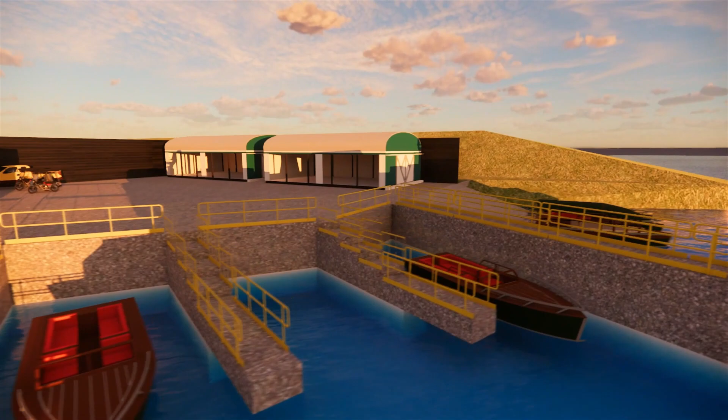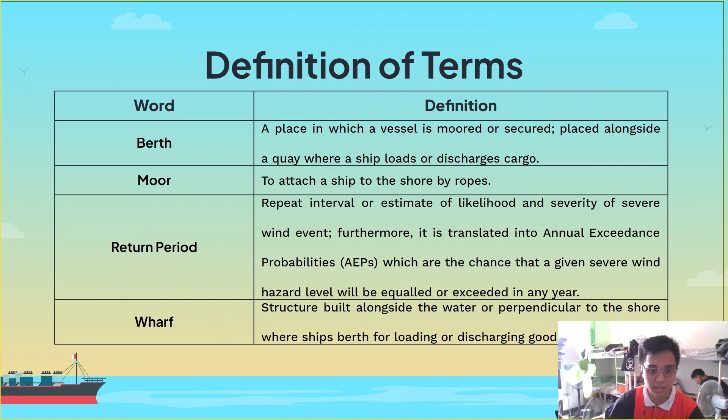For today's presentation, we will be presenting the Orion's Belt Port, our proposed port design of an artificial commercial and fishing harbor. Now for the first one, about the Orion Port, it includes the location, area, projected capacity, and the target beneficiaries. For the location, we intended to consider the area adjacent to our mission church and nearby the Orion Memorial Park. The access road for the facility will be shared with the Memorial Park

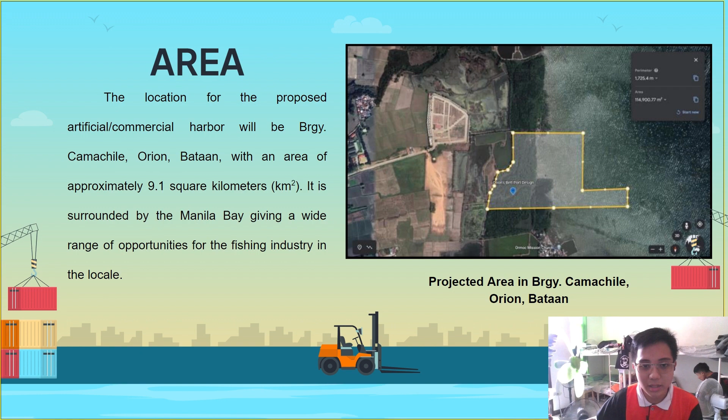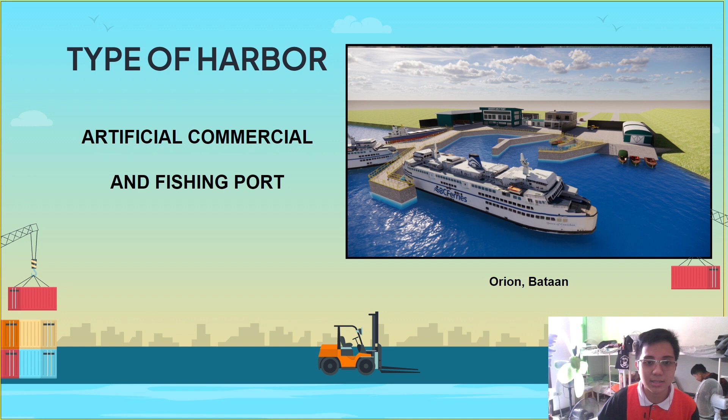approximately 767 meters apart from the Philippine National Road. And now for the area, the location for the proposed artificial and commercial harbor will be at Barangay Camachile, Orion, Bataan, with an area of approximately 9.1 square kilometers. And it is surrounded by the Manila Bay, giving a wide range of opportunities for local fishing industries. For the type of harbor, it is considered, as stated earlier, as an artificial commercial and fishing port.

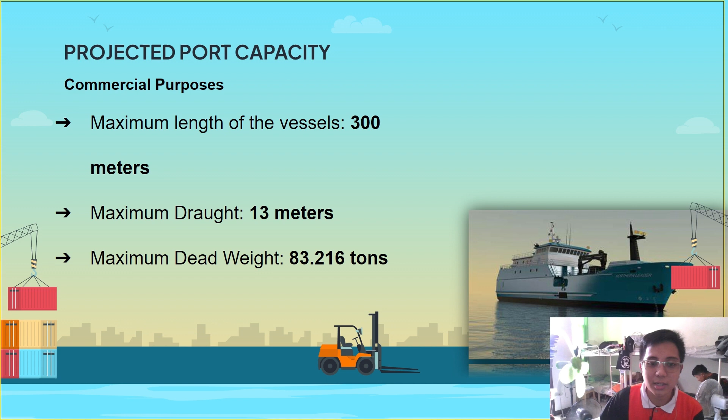For the projected capacity, first for commercial purposes, it has a maximum length of 300 meters, maximum draught of 13 meters, and maximum dead weight of 83.216 tons. For the fishing vessels, in accordance to Fisheries Administrative Order number 198-1 series of 2018, small-scale commercial fishing vessels have a range of 3.1 gross tons to 20 gross tons, medium scale 20.1 gross tons to 150 gross tons, and large-scale commercial fishing vessels greater than 150 gross tons.

Now, for the intended beneficiaries, first of all, the residents of the municipality of Bataan. Second, the people from Pampanga and Tarlac in the northern part of Luzon. Third, the passengers leaving the Manila port. And lastly, and most importantly, the local fishing sector industries nearby. The layout of the Orion port. The areas and facilities included in the design are further explained in Part 5.

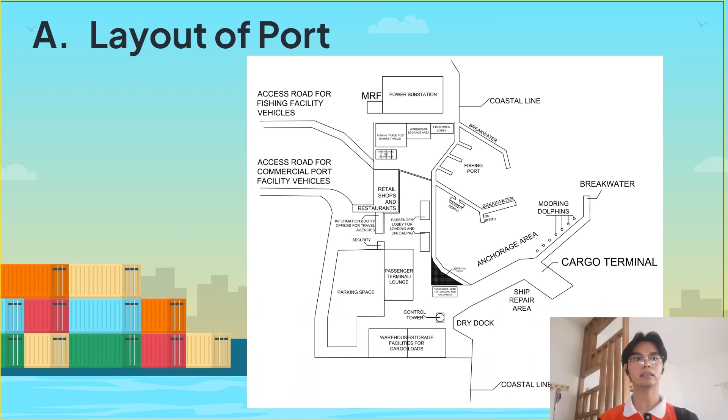The main layout is projected from the inspiration of the constellation Orion, which is partly considered in the position of the anchorage areas and etc. Moreover, the design considerations for the proposed project include the hazard report of the location, the accessibility and serviceability of the port, and lastly, the flow of the future users of the facility. For the road network of the port, the figure illustrates the flow of transportation and pedestrian traffic inside and outside the proposed project.

There are two designated access roads or entrances and exits for the site to be developed, one for the fishing area, and one for the commercial passenger or port area. The access roads are designed as two-way roads that connect to the road towards the national road. Furthermore, as the vehicle enters the commercial port, two options are given to the vehicle owner, whether to enter the premises for pick-up or drop-off, or to park on the parking spaces provided with its own entrance and exit.

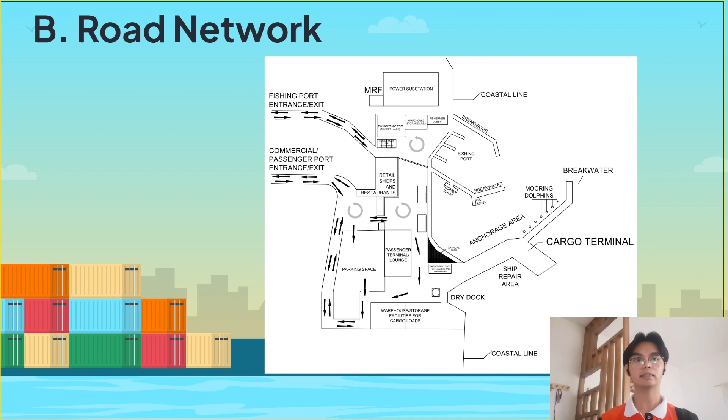Deliverables, cargo, loads, and freight are picked up on the road appointed around the parking areas to lessen the probability of traffic congestion occurring with the trucks and other vehicles sharing the access road. And lastly, the interior areas of the facilities are supposed pedestrian zones, with no vehicles allowed inside, and should be free for people flow circulation within the port facility system.

The hazard report that the proponents considered in the design of the port is the data from PAGASA for the chosen location. The wind hazard report indicated that severe winds may occur in the area. Meanwhile, for the seismic hazard, there are hazards from ground rupture, yet the fault line is assured far from the location, thus making it safe for the said hazard. The location is prone to ground shaking and is generally susceptible to liquefaction. Lastly, since the proposed project is on the coastal area, it is prone to tsunamis.

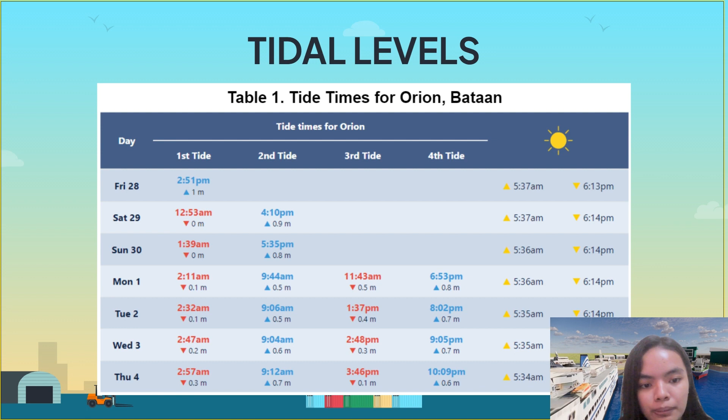The tidal levels for Orion, Bataan show that the highest tide that may occur is 1 meter above initial sea level. This data is from the tidal times chart from April 28 to May 2023. For the assessment of these hazards, there are countermeasures generated providing solutions to the safety of the proposed port. Countermeasures for the wind hazards are not included as no specific countermeasures are required, because the velocity of the wind reported, although severe, is considered normal in the station.

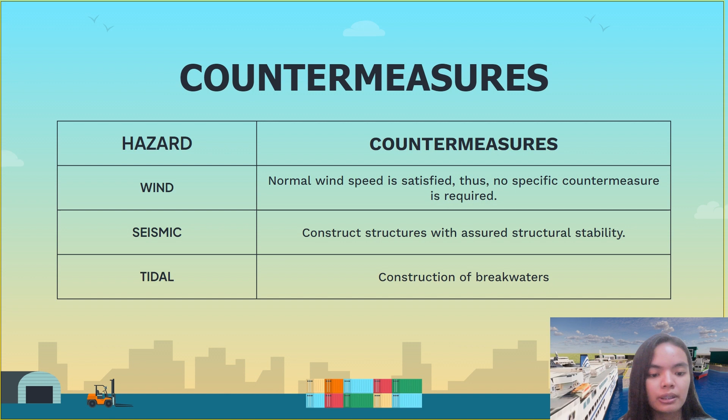For the seismic hazards, the plan is to construct structures with assured structural stability. And lastly, in response to the tidal hazard, there shall be construction of breakwaters to reduce the large currents, waves, and tides. So we have the facilities included in the Orion port. First we have the breakwater. It is a permanent structure constructed on a coastal area. It has a depth ranging from 30 to 70 meters and an area ranging from 70 to 160 square meters.

Next, we have the mooring dolphins. The mooring dolphins are smaller structures that are included in the design to assist the vessels in the anchorage areas. The mooring dolphins are situated on the major breakwater to be constructed beside the cargo terminal. Next, we have the cargo terminal facility, located next to the major breakwater and beside the ship repair area, and it has an area of 260 square meters.

Next, we have the ship repair area, often called shipyard, dockyard, or boatyard. The probable lot area for the maintenance is approximately 300 square meters. Next, we have the dry dock. It is an area from which the water can be removed for ships to be built or repaired. The projected area of the design is 15.35 square kilometers.

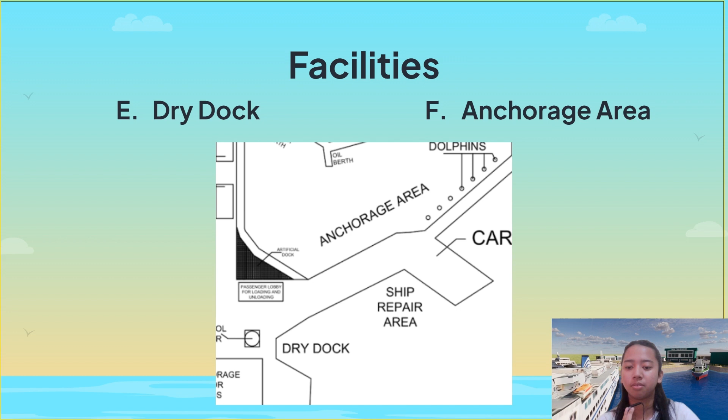Next, we have the anchorage area. It serves as the temporary parking of ships or vessels for the loading and unloading of passengers and/or cargoes. This has a proposed area of 11.63 square kilometers. Next, we have the berth. Berths are areas designated for the mooring of vessels. In the proposed design, there are two types of berths, namely tugboat and oil berths. The projected area for the tugboat berth is 6.76 square kilometers, and for the oil berth is 2.66 square kilometers.

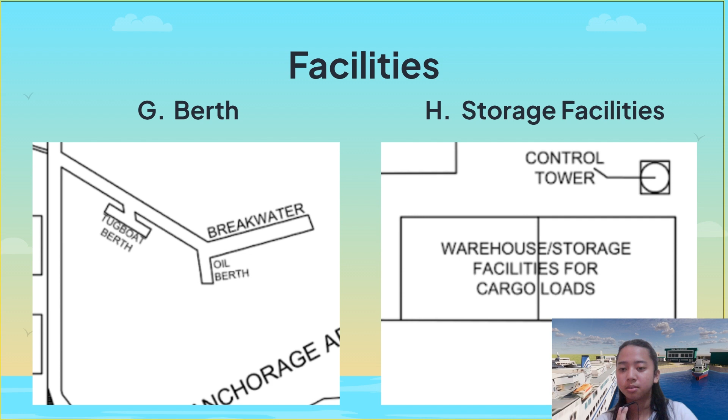Next, we have the storage facilities or warehouses, where the goods and products are stored for a certain period of time. This has a proposed area of 5.95 square kilometers. Next, we have the fishing port. Fishing vessels are considered one of the most common vessel types worldwide. For the fishing port, there is the fishermen lobby. It will serve as the lodging facility for the tools and equipment as well as the fishermen that are prepared for the deployment of fishing activities. It has an area of 623.52 square meters. Next, we have the market halls, which is the primary processing unit of the received goods from the fishing activities, with an area of 1,925 square meters.

Next to this is the control tower, which consists of the lighthouse structure specifically designed to guide incoming vessels. And next, we have the power substation. The power substation is simply an electrical system component that assists in the generation, transmission, and distribution of power. Next, we have the passenger terminal, which is a site on a seaport where people or cargo are loaded and unloaded. The terminal points aid in the separation of clients, port personnel, and government agencies.

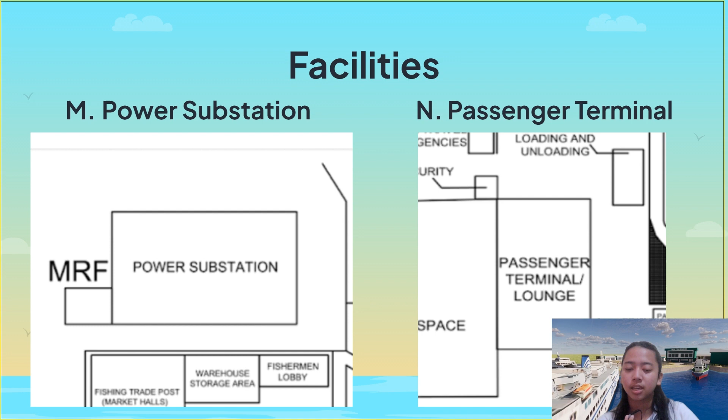Next to this are the retail shops and restaurants. These are stores that are typically owned and run by a retailer. And then we have the open parking space. Next is security. Security in ports is of utmost importance, since ports are critical infrastructure that serve as a gateway for international trade and commerce. Next, we have the information booth for passengers and guests looking for information about the port and its services. And lastly, we have the materials recovery facility, which is a specialized building used in ports for sorting and recovering recyclable or reusable materials.

For the methodology, the chosen locale for the proposed port is Orion, Bataan, as seen in the figure. The methodology used to obtain data was through a close-ended survey questionnaire. The researchers were able to gather responses from 7 people from Orion, Bataan through online interaction. Most of the respondents' ages ranged from 21 to 37 years old.

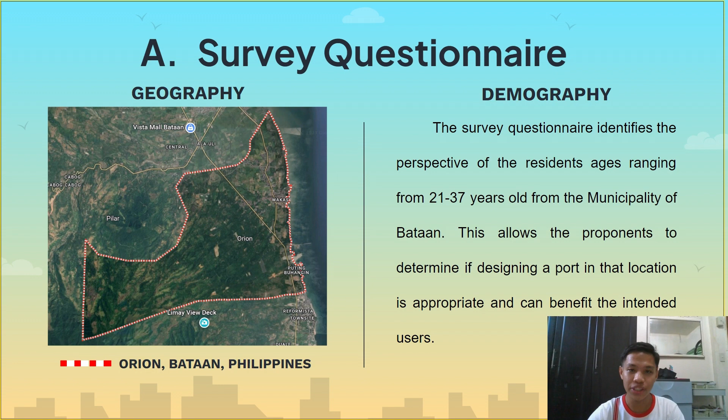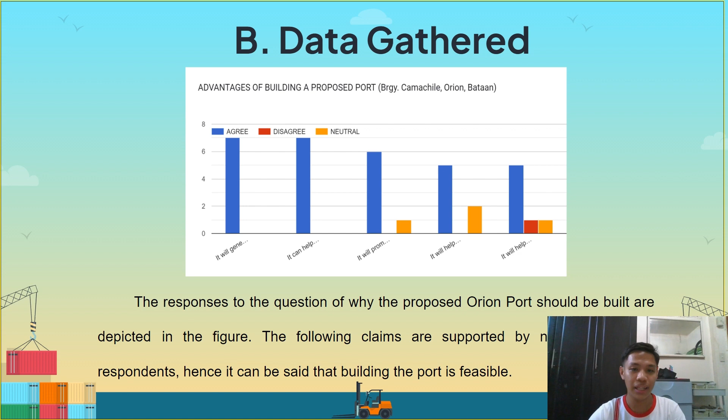Next slide, please. For the data that has been gathered, the raw responses from the questionnaire were graphed and then interpreted. The responses to the question of why the proposed Orion port should be built depict that all the claims are supported and that the construction of the port is feasible. For example, from the first stated advantage of the port, when asked if the port will generate various job opportunities for the community and the market industry, all of the respondents agreed on the said claim.

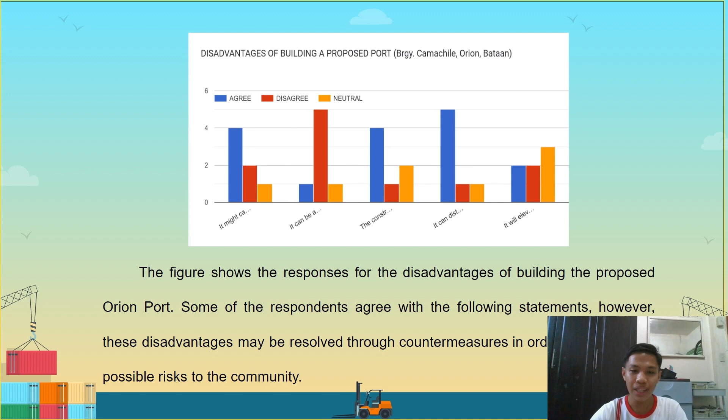Next slide, please. From the results and summary of the survey, it can be implied that there are both benefits and drawbacks to developing a port in the area, based on the information received from the respondents. However, in order to efficiently design the port, countermeasures can be taken and the standard requirements must be followed.